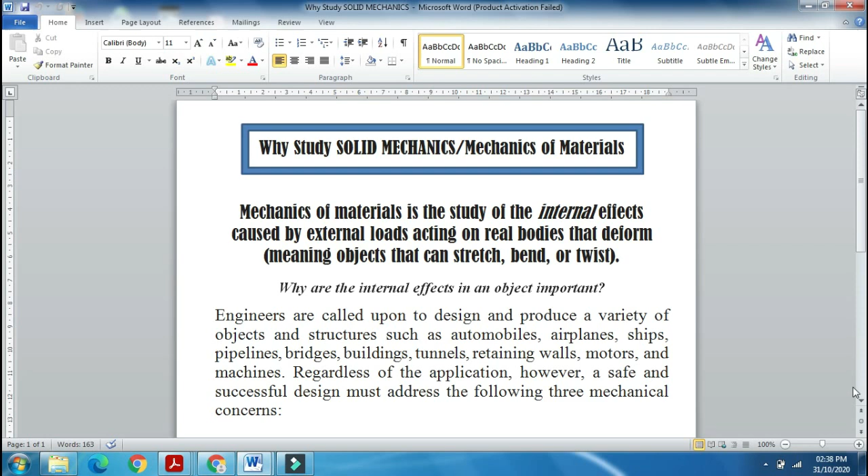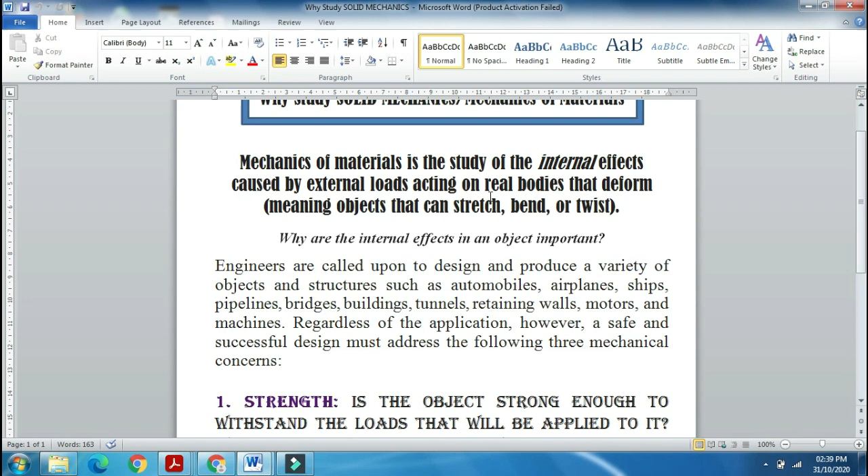So what are the internal effects? Why are the internal effects in an object important? What is the importance of these two words, internal effects? Why is it very important from the load and stress point of view? So we'll explain this.

Engineers are called upon to design, and not only to build and design, but to design systems or components that are plugged into various assemblies to perform functions that are helpful for humans, for society. Whether they are designing automobiles, airplanes, aircraft, structures, bridges, dams, tunnels, or machines, regardless of the application, those designs should perform appropriately, but they also need to be safe.

They need to be safe, because whatever design you make, whether it's a bridge, a building, or an aircraft, it will be used by humans, and a lot of humans will be using it. So it needs to be safe for performing all its respective functions, and a safe and optimum successful design functioning must address the following three mechanical concerns.

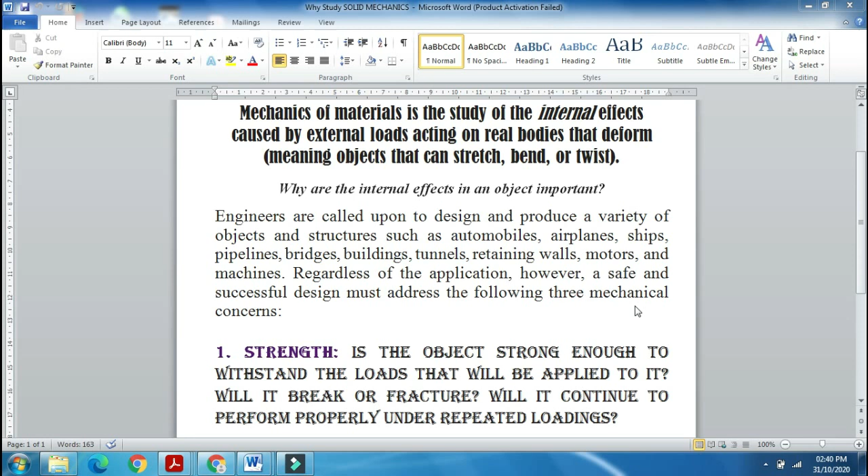The three important things are strength, stiffness, and stability. They are very closely related, but if you understand them, they are miles apart. This is basically termed, when you study solid mechanics, as the concept of 3S: strength, stiffness, and stability.

Strength explains whether the object is strong enough to withstand the type of load that it is being designed for - the design load. Is it strong enough to take that load, or will it basically yield, break, or fracture?

The most important thing is, once the load is applied, will it continue to perform properly under the loading, especially if it is designed for taking fatigue loads or repeating loadings? A bridge design is one example of this, as is any structure undergoing constant repetitive loads. So any design based on solid mechanics must have appropriate and optimum strength - otherwise it will basically yield, fracture, or break.

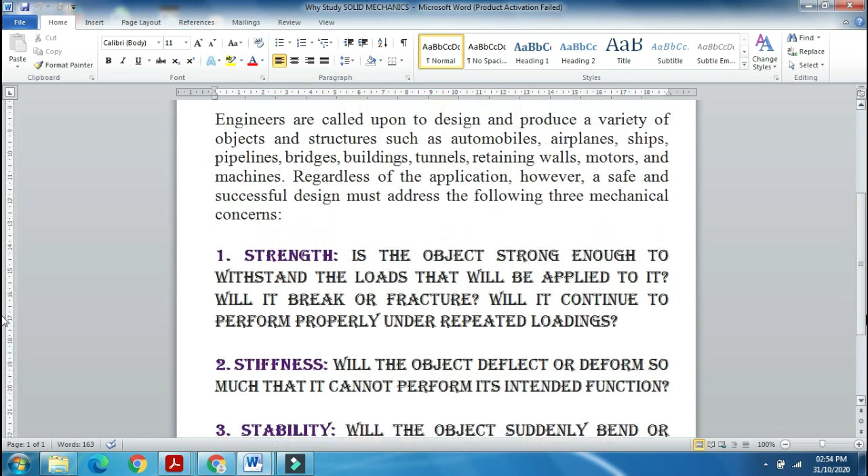So whatever design is under consideration, you must take into account, very importantly, where you will be designing your object to perform its intended function. Another thing is that it must be performing within its design limits. It must be safe - another very important point.

And apart from that, it must be beneficial for the society, and it must have three inherent solid mechanics design features: number one, the strength; number two, the stiffness; and number three, stability. You must understand these three typical aspects very clearly: the strength, the stiffness, and the stability.

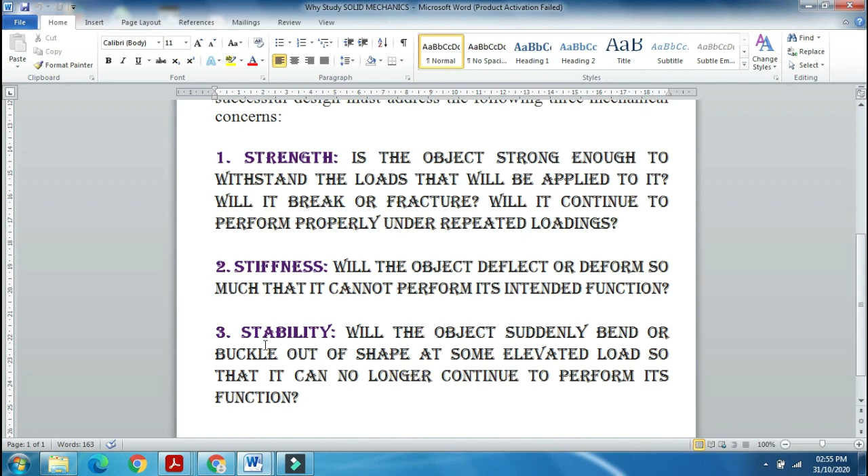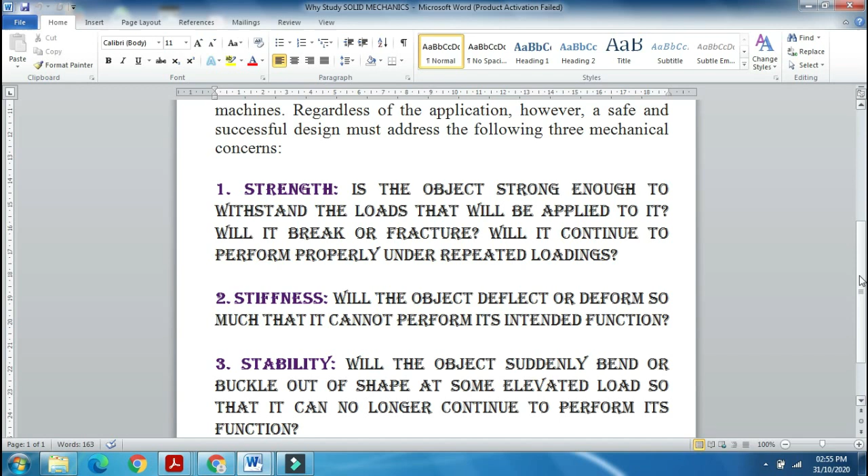I hope from now onwards you understand that whenever you are modeling based on engineering mechanics design or solid mechanics design, even in machine design or elements of machine dynamics design, these three features are very important in designing machine elements and components. Whenever you go for your final year projects, you must always take account of these three features: strength, stiffness, and stability. These are the key features whenever you design any structural component. I hope you understand it clearly.

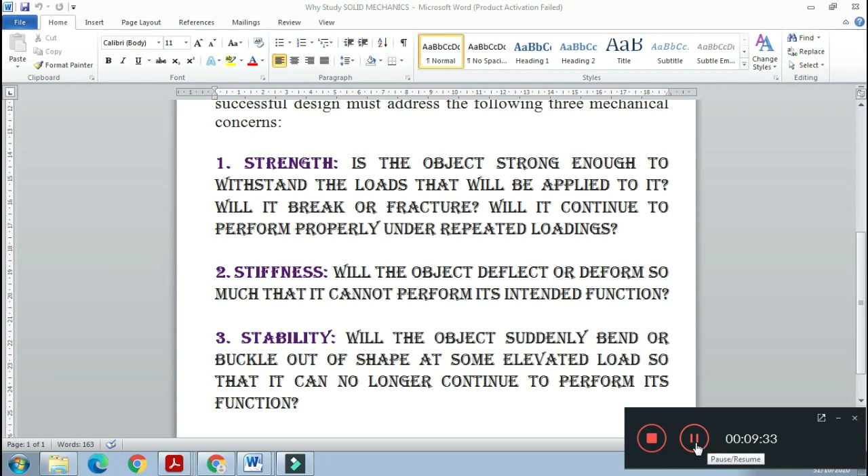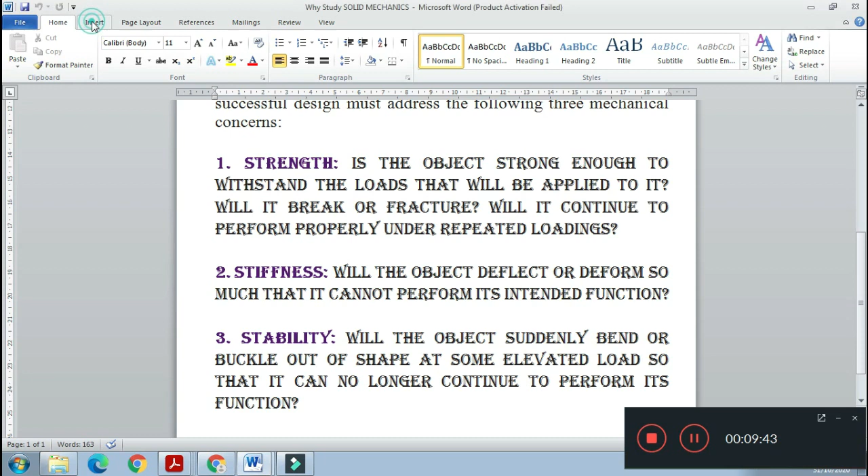Okay, now we go to another very important slide based on the knowledge that we have gathered.

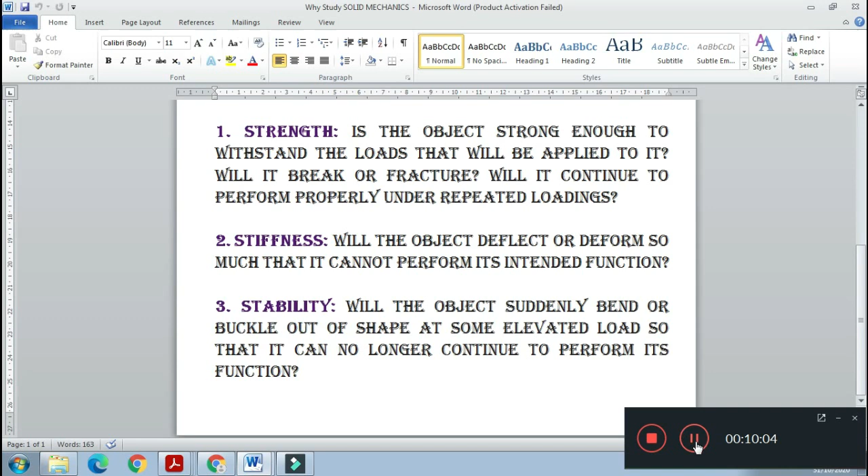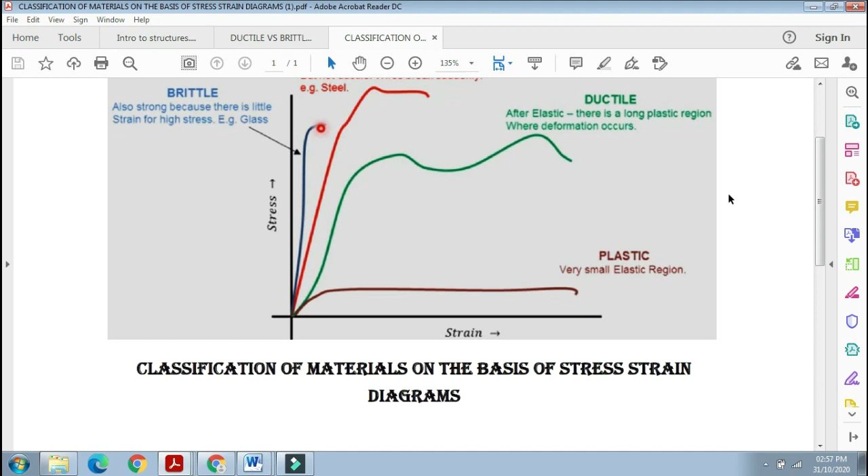Then we go to another very important thing: classification of materials on the basis of the stress strain diagram. Materials can be classified very easily. You might have done this type of chapter in solid mechanics 1, mechanical properties of materials, where you studied stress strain curves in detail - how to get the elastic limit, the proportional limit, the yield, toughness calculations, the fracture point, and UTS, ultimate tensile stress. All these points you covered in mechanical properties of materials, likely citing chapter 3 of RC Hibbeler.

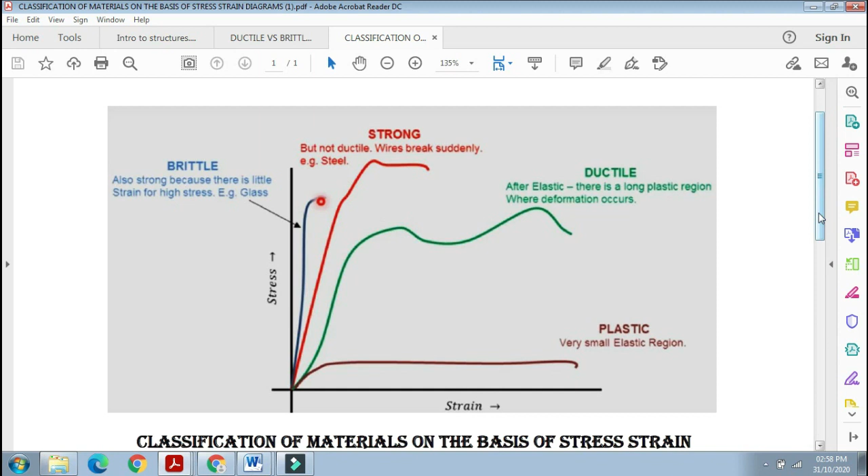So here you have a stress strain diagram. The stress is on the ordinate and the strain is on the abscissa - the x-axis and y-axis are very critical. You could have different types of materials, and these are the curves of various generic materials that you might have come across. This is the most familiar curve to you.

This is basically a ductile material, which you can consider as aluminium or mild steel. If you look at this curve, its origin starts from there, and then it continues to perform. This is the fracture point, and sometimes this will be like its UTS, which tells you that necking has started from here onwards, and here it is undergoing some sort of yielding. These points are very important.

So after the elastic zone, there is a long plastic region - from somewhere here, yielding begins, followed by a long plastic region. What's happening is that stresses remain comparatively unchanged, but there is a very long deformation. This is a typical example of a ductile material, where an axial load, for example tension, is applied and deformation occurs.

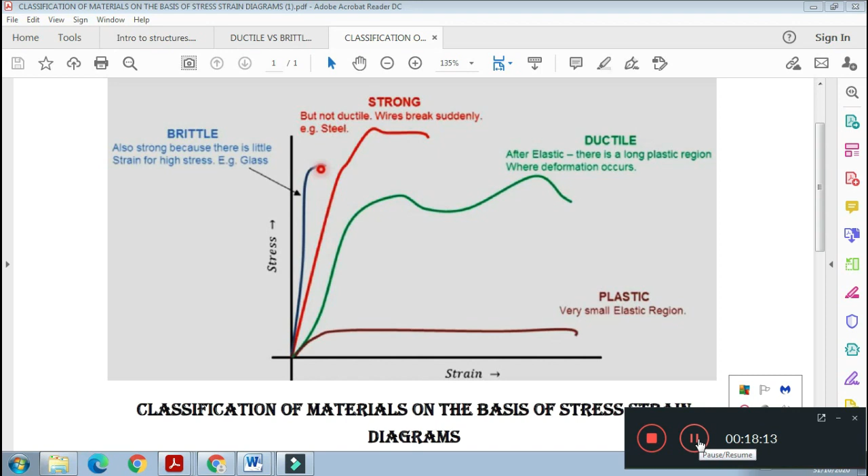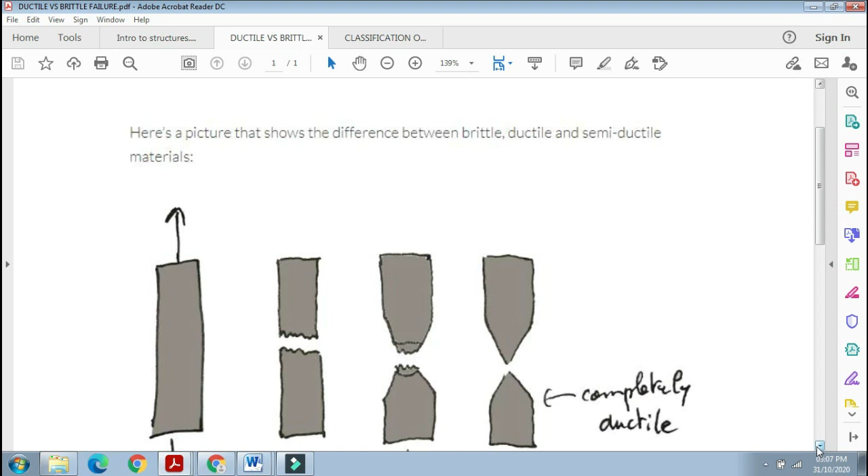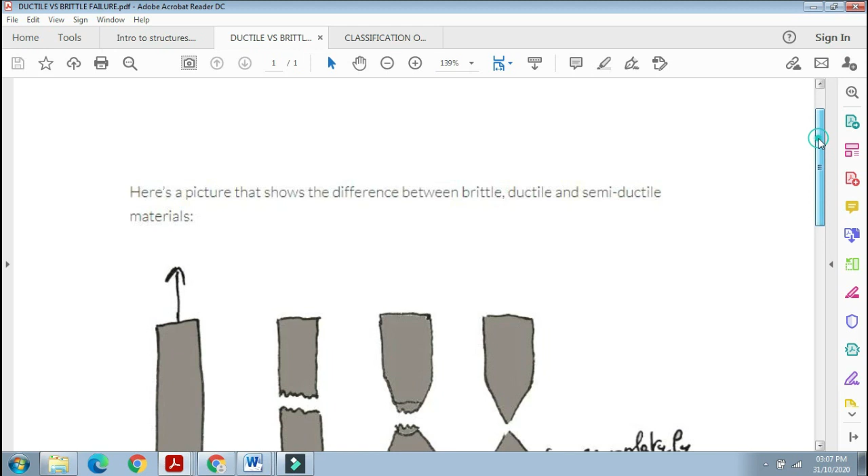Okay, now there is another thing I've told you, the stress strain diagram, and here is a picture that differentiates materials based on your knowledge of the stress strain curve. You have a brittle material, you have a ductile material, and some materials which are basically intermediate between the two. So whenever you go for material testing, you have various types of stress strain curves acting in your system.

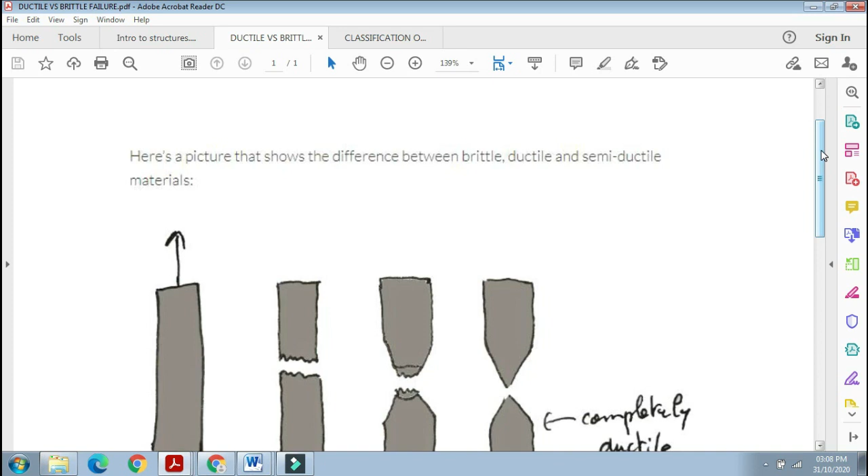Here's a picture of a material in which you're applying an axial loading, and you know which machines you can perform this test on. If you recall your last year solid mechanics practicals, it will be the universal testing machine. On this machine, a tensile load is being applied.

Because of this tensile load being applied, the material will deform. To remind you how we calculate the deformations of that material: the most accurate option is strain gauges, but they are very costly. The second best option, if you do not have the financial resources, is the device termed the extensometer, which is used to get the deformation in case of a universal testing machine.

I know you might have seen those extensometers or strain gauges being shown to you in our solid mechanics/strength of materials testing lab by the lab engineer or demonstrator, showing how the deformations are calculated in case of a universal testing machine.

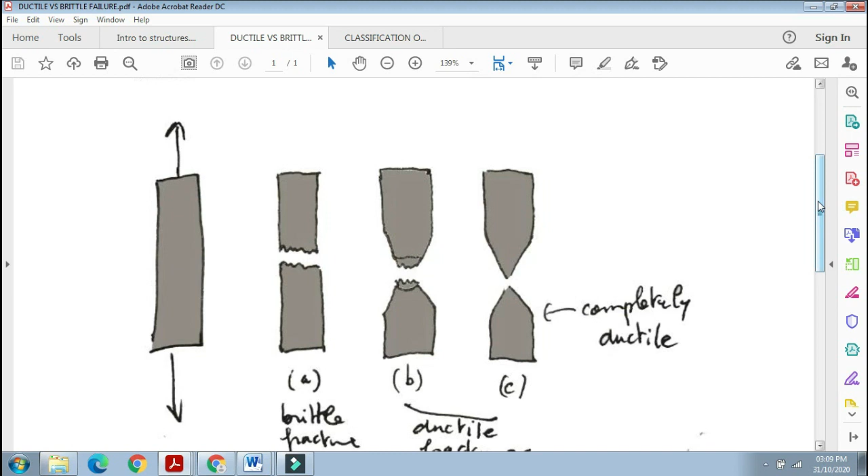The results basically depend upon what type of material you are using. So if, for example, you're using cast iron, it will have a very unique kind of failure.

For example, if I coat a sample, whether it's a ductile material or a brittle material, and we do not know directly which is which - let's say one material is X and another is Y - and show you various samples, how will you be able to tell that this is a ductile failure and this is a brittle failure?

If you look at this point, this flattening of the area discontinuity is basically an example of a brittle failure. Then ductile failures can be semi-ductile.

It can be a fully ductile, complete ductile material, or it can be a semi-ductile material. If there is a completely ductile material, as in the case of aluminum failure, you will have this type of a V-shaped slot being formed with a very small circular cone type formation.

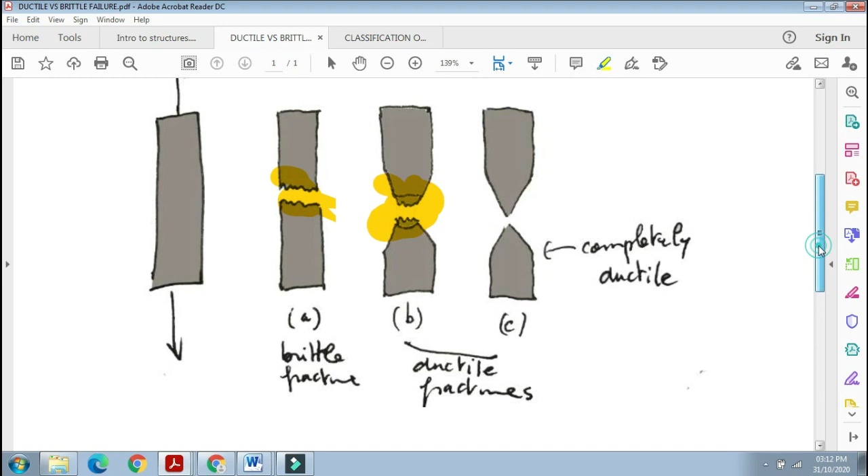These points basically tell you that the cross section is getting reduced, resulting in a specific necking formation, until complete failure has taken place and the material has shown discontinuity within its grains. So you should be able to understand this kind of failure - a brittle failure, ductile failure, and a completely ductile failure.

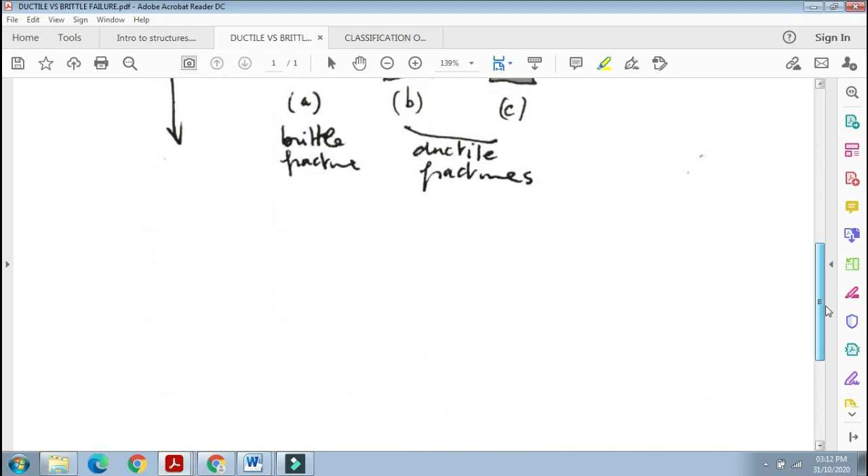So this is a very important slide as well, reminding you of the various types of failures that can occur in brittle, ductile, and semi-ductile materials, and you know the names of those materials as well.